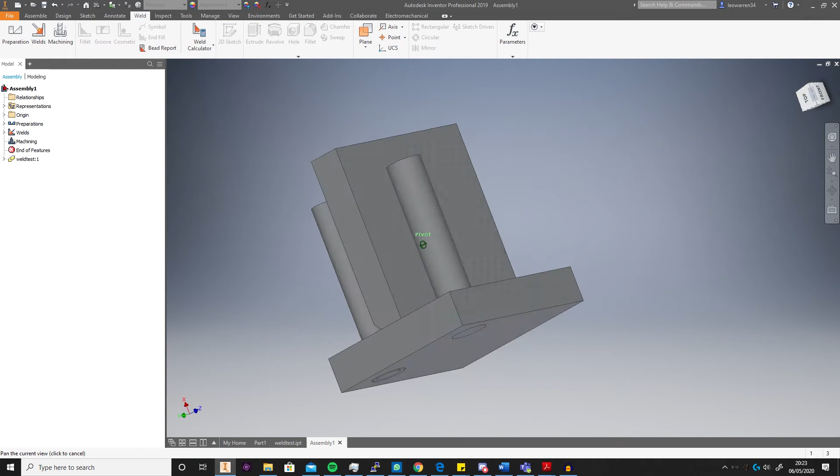Here's my little welding test dummy piece, which is just here to show what you could potentially do with weldments. It's got a variety of posts and conditions. I did add a little chamfer here, which you can do in preparations - I'll cover preparations next video.

So you can see here we've got some options. Let's start with this. If we hop onto welds, and then groove should light up, you can select groove weld. What you see here is the groove weld interface: face set 1, face set 2, and fill direction. That'll dictate what direction it fills and how it fills, or whether it just fills everything as a whole, solidly filling in between the faces.

Depends what you want. Then you've got full face weld, where the two faces you set will fully weld to each other, and you can actually have it so only one face gets fully welded, so it kind of tapers off. And then obviously you've got chain faces, and create weld symbol, which we covered last week.

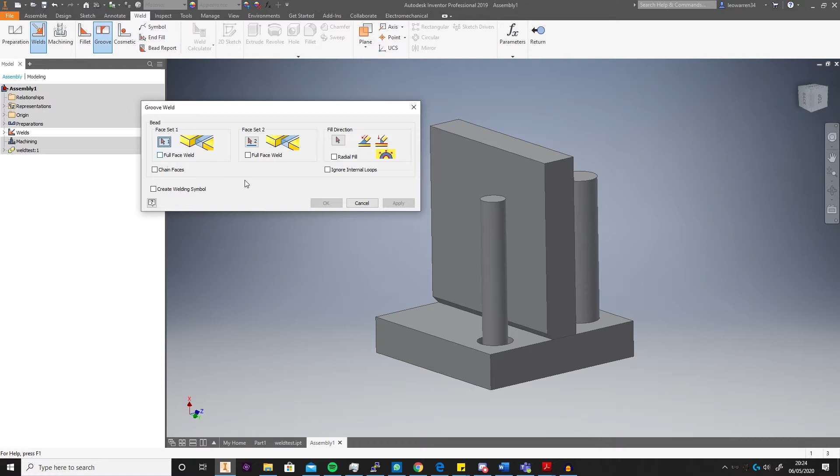So let's go on to face set 1. We can select the ground, and we're going to select this little one here, and fill direction. There's a couple things we can do. We can set radial fill, and that will just kind of weld it all up, job done.

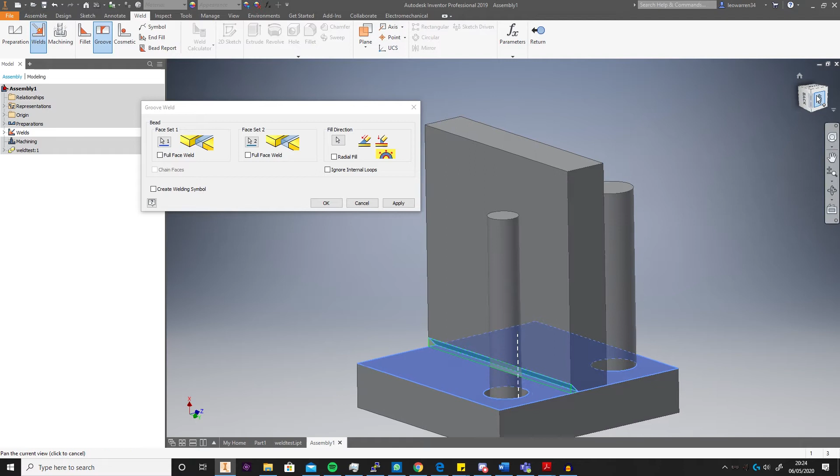Or we can be a bit more specific. We select fill direction, we can select the ground plane, and you can see it now just welds in - completely flat, completely neat, perfect really. Or what you can also do is select the axis perpendicular and weld along that, and it'll pretty much do the same as the radial.

I'm just going to leave it as that. And then we can just select create welding symbol, and it creates the welding symbol. There's nothing really to grab here, so you can just click apply, job done.

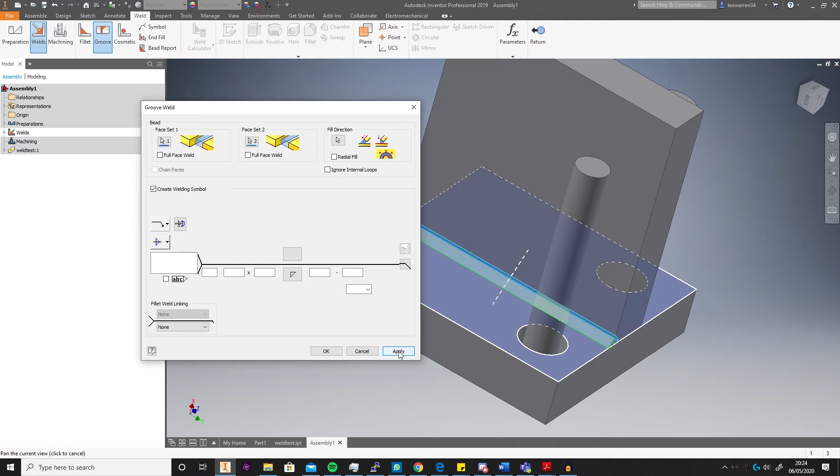The next thing we could do is weld onto a post. So we can select face set 1, and we can select face set 2. And if we select radial fill, you can see now it's filled it all in.

The thing you've got to be careful with is full face welding, because if you have it set on full face weld 2, you see it's going to weld all the way up to the top of the post, which is just not where we want it. We're here just to secure the post in. You can select it, it doesn't make much of a difference, it's going to weld it in.

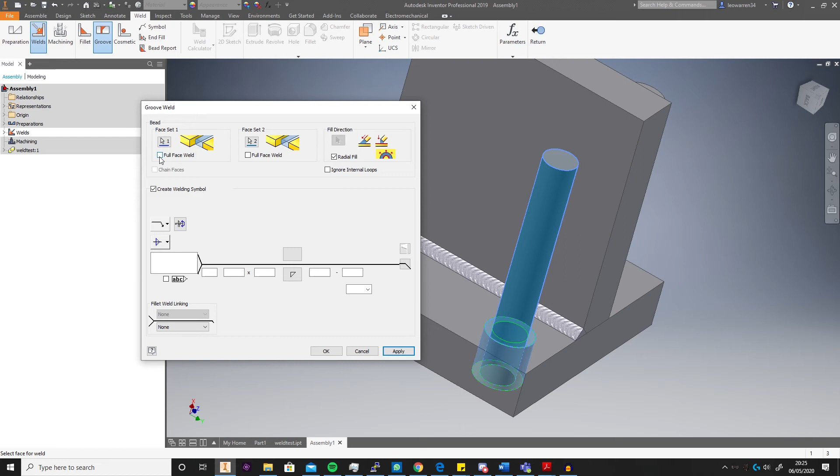And obviously you've got a weld symbol, don't always need it this time, just click apply. And there you go, it's that simple.

Groove welds are in some ways easier to do in Inventor, because there's no intermittency, there's far less in terms of customizability. It's just weld one face to another, but remember, they're no substitution - so when a time calls for a fillet weld, use a fillet weld.

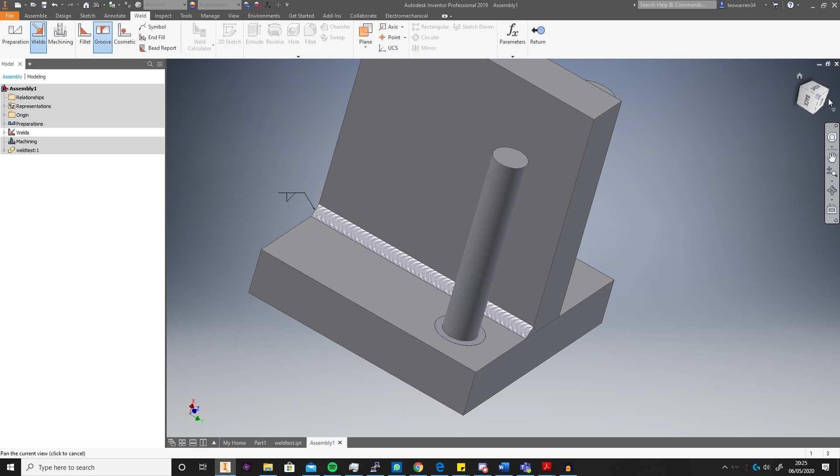It just makes the file history, when you look at the welds, so much cleaner. You see groove weld 1, groove weld 2, everyone knows what you speak about in the plans and wording, symbols and drawings. And so yeah, that's it for this week.